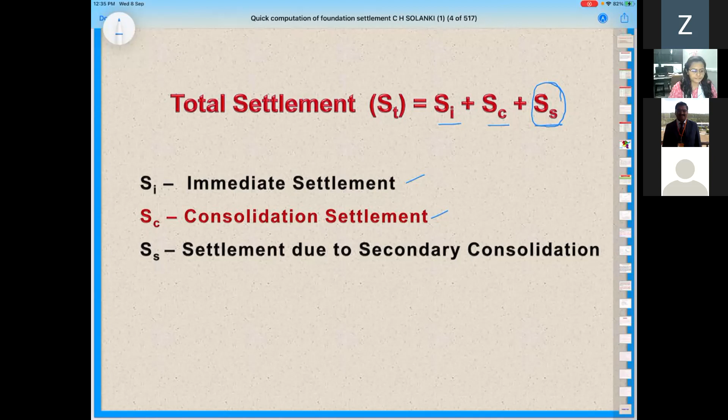Why have we selected this topic and what is its need? Whenever you go for sampling, there are chances of sample disturbance, hence reliability is poor in case of such collections. Time to investigate takes much time to finalize the soil report. Whenever you perform a consolidation test, it takes a longer time, requiring loading to be applied progressively and corresponding deformation measured. Consolidation tests are also slightly expensive compared to other tests.

Hence in many cases, the soil report excludes the consolidation test even when it is needed for saturated clay. The aim of this work is to establish a fairly reliable forecast of consolidation parameters and total settlement at a specified time, using statistically acceptable reduced number of tests, saving both time and cost. This presentation proposes a new approach for quick settlement analysis of cohesive alluvial deposits using new empirical correlations for compressibility parameters.

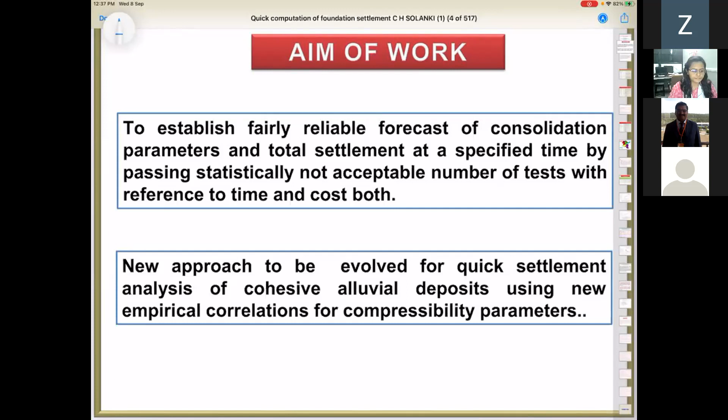The scope of this presentation includes: first, subsoil characteristics of alluvial deposits, discussing the characteristics found in the South Gujarat region and surroundings; second, empirical correlations for compressibility parameters of soil available from the literature as well as our own attempts; third, statistical analysis of the subsoil characteristics; and finally, verification of the range of properties by laboratory tests and the new correlations developed.

Proposed new empirical correlations for alluvial deposits, including validation, will be presented here. Finally, the most important part of this presentation is to show the empirical model for foundation settlement of alluvial deposits. At the end, we will see the empirical model we have prepared for computation of the foundation settlement.

Whenever we are starting any research, we need to go through the literature review. Your guide will ask you to go through the literature review first. How it has to be done and what to do in it is very, very important.

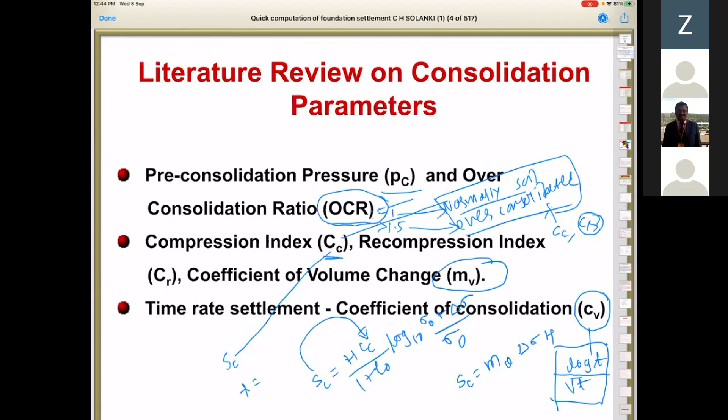Pre-consolidation pressure or stress is the maximum effective stress to which the soil has been subjected in the past. Casagrande's method to obtain the pre-consolidation pressure from the consolidation test is based on the point of greatest curvature. Many of you are familiar with pre-consolidation pressure and its determination using consolidation test data - this is the procedure for performing the consolidation test.

Finding out the pre-consolidation pressure using the void ratio versus log sigma curve. What we are doing is establish a point A at which the curve has a minimum radius of curvature. So this is the point A where you are establishing the curve.

Draw a horizontal line AB. You need to draw the horizontal line AB. Draw the line AC tangent at A. You are doing these things.

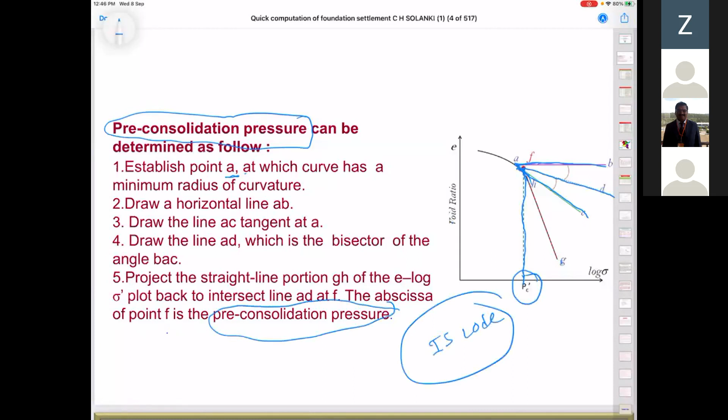Draw a line AD which bisects this, and project the straight line portion GH of the E versus log sigma curve back to intersect line AD at F. This is intersecting at F, and corresponding to this point on the log scale, you are finding out the corresponding PC, that is the pre-consolidation pressure. This method is accepted by our IS code, which is the Casagrande's method to find out the pre-consolidation pressure.

Now, over-consolidation ratio is related with the pre-consolidation pressure. This parameter is used in determining the magnitude of the settlement. The ratio of the pre-consolidation pressure and present overburden pressure is known as the over-consolidation ratio. So OCR indicates PC upon P0.

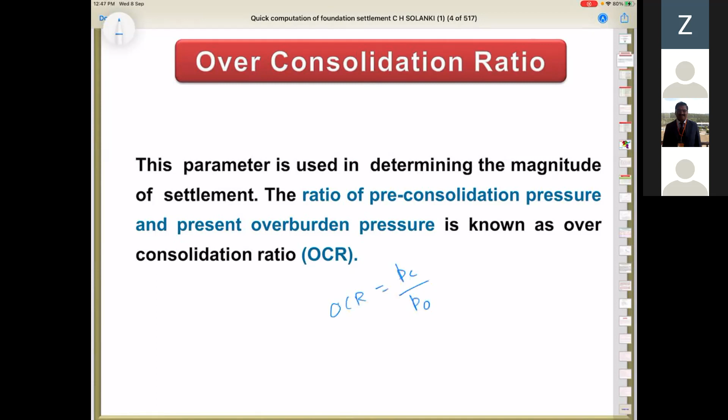Various graphical methods are available to evaluate the pre-consolidation pressure. As shown, the Casagrande's method is accepted by the IS code for determination of the pre-consolidation pressure. These methods are usually based on the relationship between experimental void ratio E and effective consolidation pressure P dash. All these methods are operator dependent as they require accurate reading of the logarithmic scale, drafting capability, and proper judgment of selecting the points.

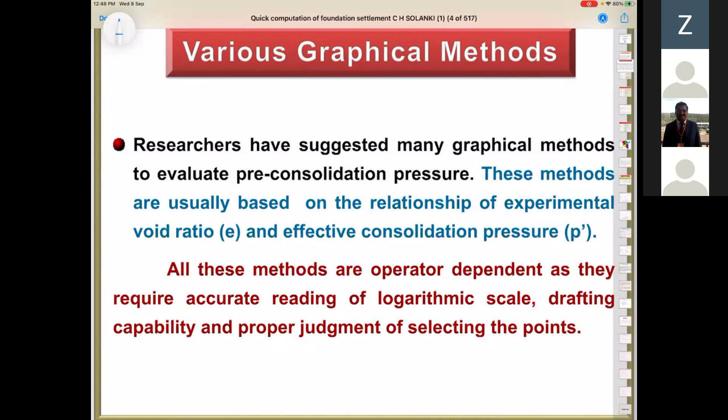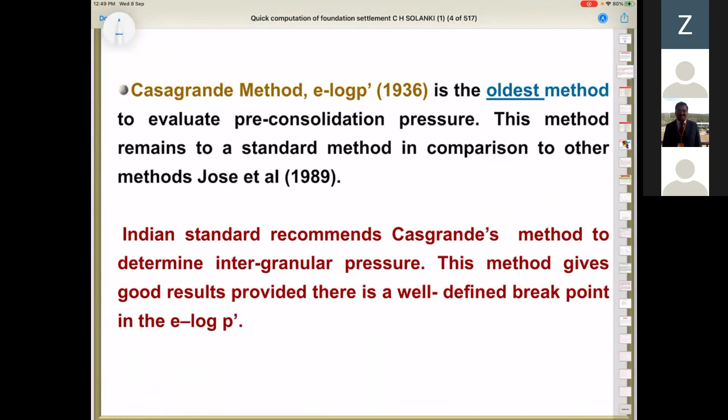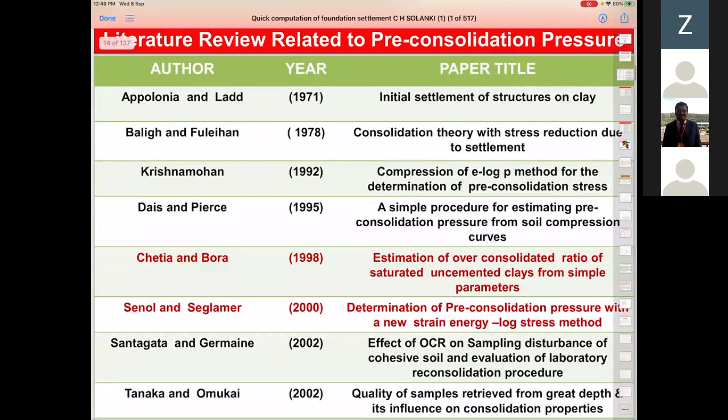Now we are coming to the literature review related to the pre-consolidation pressure of the soil.

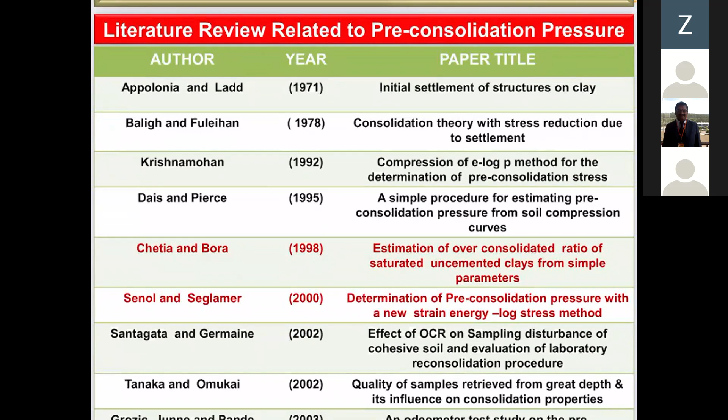Here you can see that some of the literature have been shown in red color. These papers are being used most in our study, and I will be discussing what we have collected from this literature and how it has been utilized for our study. Similarly, you will find some papers marked with red color which have been used for our work.

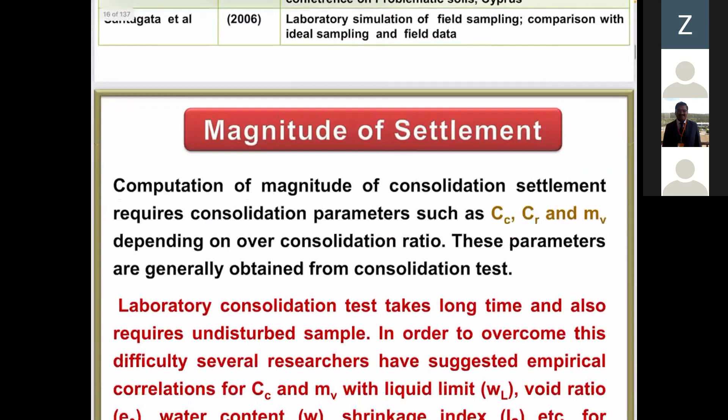Now we are coming to the magnitude of the settlement. As discussed, whenever we study consolidation settlement, we need to know the magnitude of the settlement and how much time it will take to settle. As far as the significance of the parameters are concerned, in view of CC, CR, and MV, which has been shown in the previous slides.

Laboratory consolidation test takes a long time and also requires undisturbed samples. In order to overcome this difficulty, several researchers have suggested empirical correlations for CC and MV.

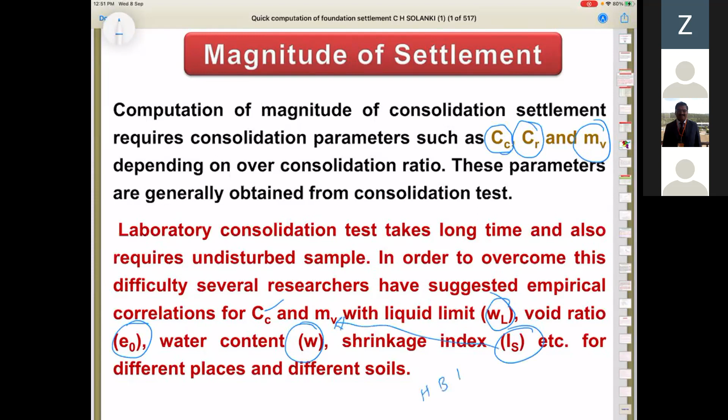Various empirical correlations have been suggested by researchers for the compression index, using the liquid limit, void ratio, water content, and shrinkage index. Shrinkage index is correlated for the value of MV, which has been given in the paper by Professor H.B. Nagaraj.

Compression index is the terminology which you find from the E versus log sigma curve, as the slope of that curve. So CC is found as delta E upon delta log sigma, which you calculate using the consolidation test data, in the form of delta E upon delta log sigma.

Whereas these empirical correlations are suggested by various authors and researchers such as Skempton, Terzaghi, Nishida, Amin, Nath, Park and Koumoto, and Nagaraj. Recompression index CR is the slope of the E versus log sigma rebound curve.

This is the term CR which has to be obtained from the rebound curve, and a new terminology has been introduced in our study, that is the compression ratio CC dash, equal to CC upon 1 plus E0. So we are going to introduce this parameter in our study in developing the correlations for CC dash.

So whenever you refer to the equation of consolidation settlement, SC is equal to H times CC upon 1 plus E0, times log10 of (sigma0 plus delta sigma) upon sigma0. This part is known as CC dash.

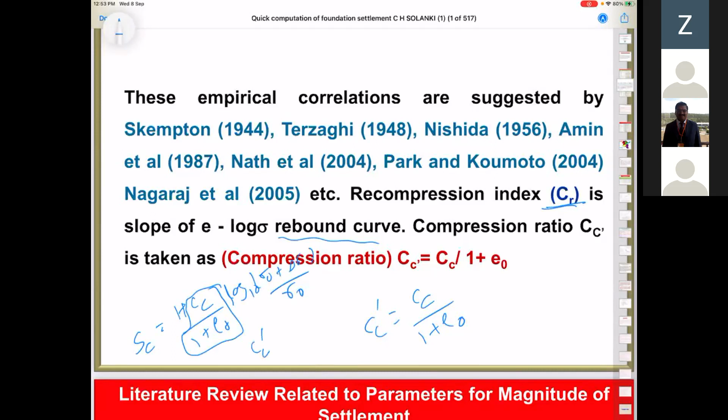Literature review related to the parameters for magnitude of settlement has been mentioned here. The papers shown in red color are being used in our study for various purposes. Other references or literature are for your reference, and if you need to refer anything from that, you can get it.

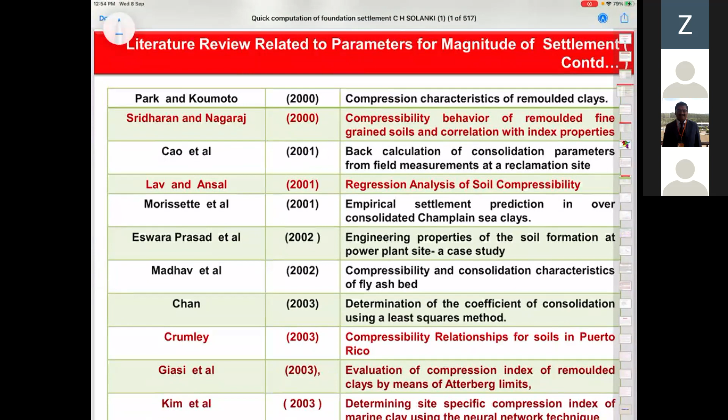These are the papers related to the magnitude of settlement, and it has been continued in terms of the long list of literature for determination of various parameters, such as the compression index, using simple properties of the soil.

Saxena et al. in 1995 presented one paper in the Indian Geotechnical Conference, IGC 1995, for the correlations of the compression index using simple properties of the soil.

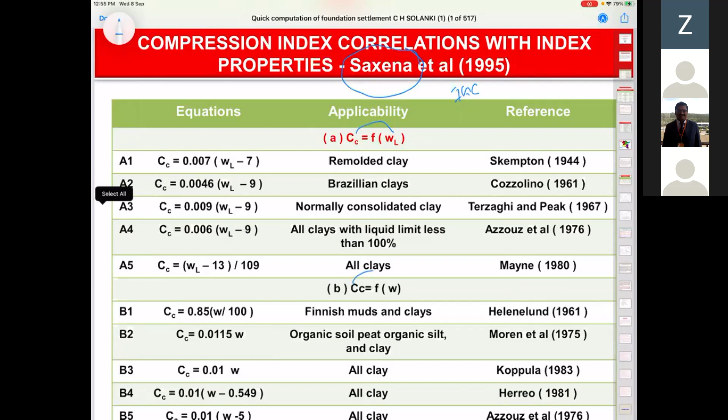In part A, you can refer that the compression index is correlated with the liquid limit. Here the compression index has been correlated with the water content. Here the compression index has been correlated with the void ratio. And here the compression index is related with multiple parameters such as void ratio, liquid limit, and water content.

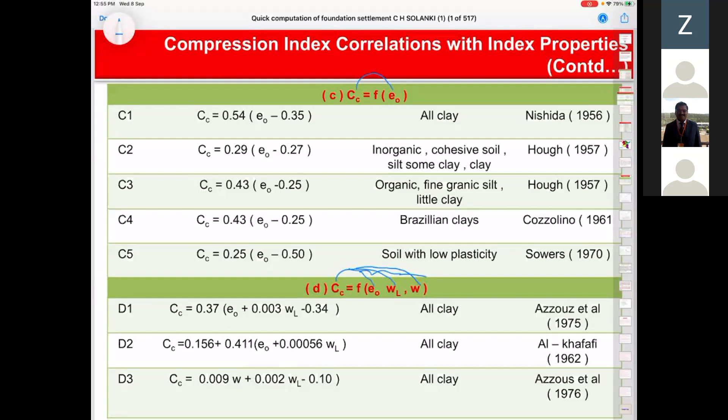This has given us some guidelines on what parameters have to be used for determining the consolidation parameters, and accordingly we have started our study for developing new correlations for the compressibility parameters.

Coefficient of compressibility is one parameter given by av equals minus delta e upon delta sigma, and the unit of the same is meter square per kilonewton.

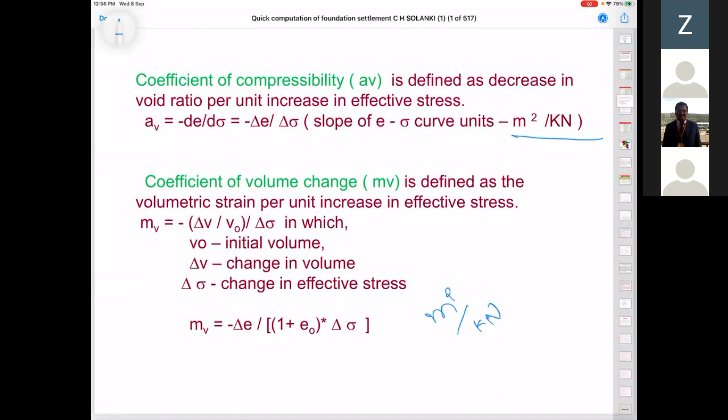Similarly, the coefficient of volume change, mv, is equal to minus delta e upon 1 plus e0 into delta sigma, and you can find out the coefficient of volume change according to this. The unit of these parameters is meter square per kilonewton. You might not find these units anywhere else, but this one is unique.

The coefficient of volume change, mv, is a parameter which indicates the amount of compression that the soil will undergo with an increase of pressure. It is defined as the change in volume per unit volume for a unit change in effective vertical stress, given by mv equals delta e upon 1 plus e delta sigma v.

Nagaraj, 2005 - H.B. Nagaraj is a professor in Bangalore at one of the universities. He did his PhD study from IISc Bangalore and presented a paper at IIT Madras in 2005, in the symposium named Predictions in Geotechnical Engineering, where he correlated the value of mv with the shrinkage index, IS.

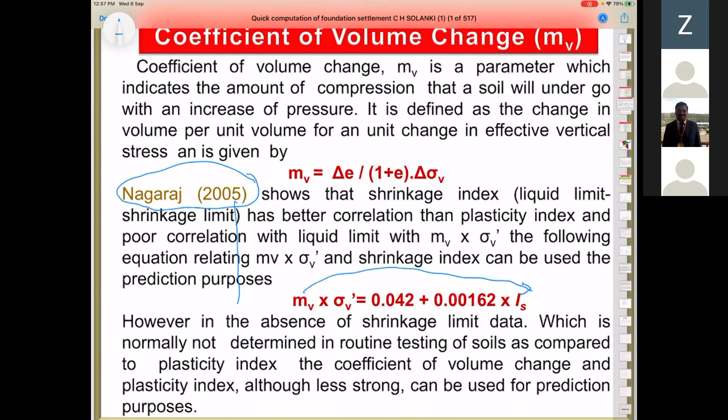So the correlation of the coefficient of volume change with the shrinkage index, developed by Professor Nagaraj, has been presented here in this slide.

Time rate settlement: it is essential to conduct a routine one-dimensional consolidation test to obtain the coefficient of consolidation, Cv. Various time fitting curves are available to evaluate Cv. This is a time-consuming process, and curve fitting procedures available in the literature are not completely satisfactory in evaluating Cv, hence large variation is obtained in the evaluated values by different procedures.

Nagaraj, 2004 - generally square root time fitting or log time fitting curves are used for the evaluation of Cv. The rate of settlement is directly related to the rate of excess pore pressure dissipation. Coefficient of consolidation Cv is useful in determining the time required for a finite percentage of consolidation.

The coefficient of consolidation, Cv, generally decreases as the liquid limit of the soil increases. The range of variation of Cv for a given liquid limit is very high, and Cv varies with both the level of stress and the degree of consolidation. So Cv is one of the important parameters, as discussed, in determining the time rate settlement.

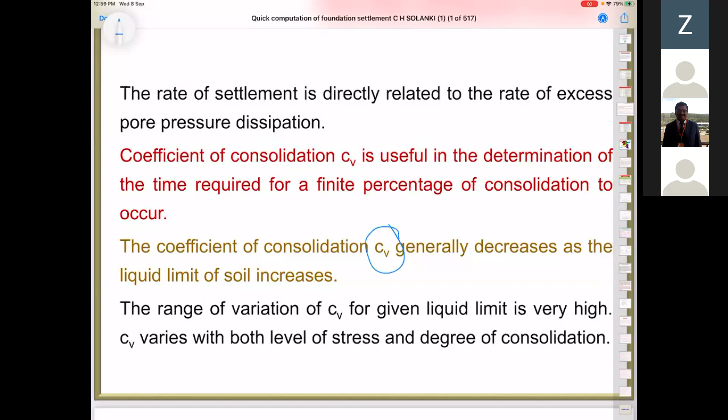A logarithmic scale, that is deformation or dial gauge reading versus time, has to be plotted in view of deriving the value of coefficient of consolidation. This is the log time fitting method, and the procedure has been listed here in this slide, where you obtain the Cv value at 50% of the average degree of consolidation, with the time factor taken as 0.197.

H is the thickness of the stratum, which is responsible to drain the water - thickness of the stratum - and T50 is the time required for 50% consolidation.

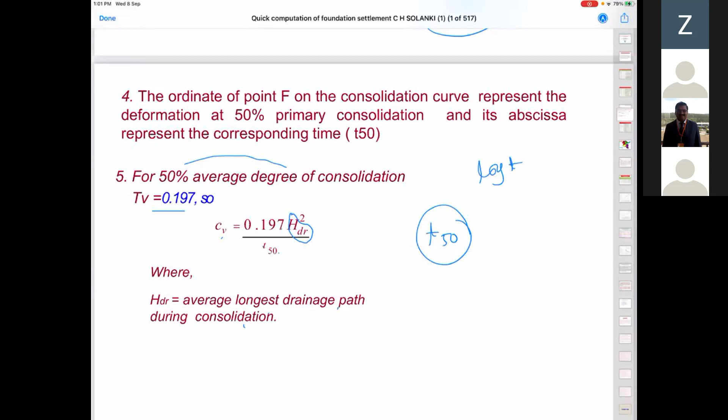This method of log time fitting gives you the value of time required for 50% consolidation, with the average longest drainage path during consolidation taken as HDR, the drainage path. The log time fitting method gives you the T50 value, whereas the square root time fitting method gives you the value of T90.

Time required for 90% consolidation can be obtained by the square root time fitting method. The time factor for T90, that is 90% consolidation, is 0.848, and hence you can find out the coefficient of consolidation value CV using this square root time fitting method.

Now the coefficient of consolidation has been correlated by various researchers with the liquid limit. This shows that an increase in the liquid limit decreases the coefficient of consolidation. So the values increased and these values are being decreased, which indicates that the increase in liquid limit decreases the coefficient of consolidation.

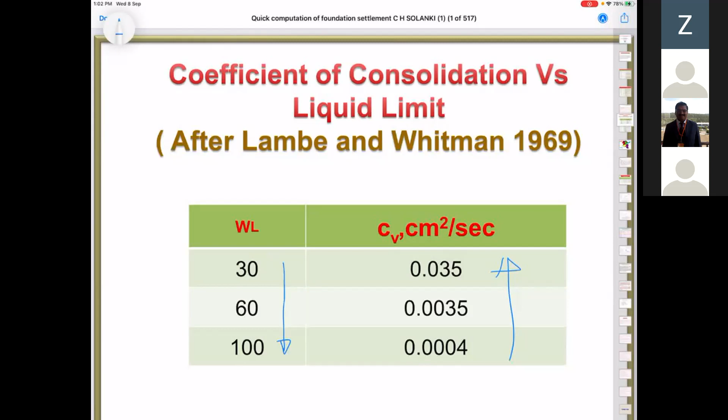Lower the value of CV, the time required for consolidation is higher, and accordingly, higher the value of CV, the time required for consolidation is lower.

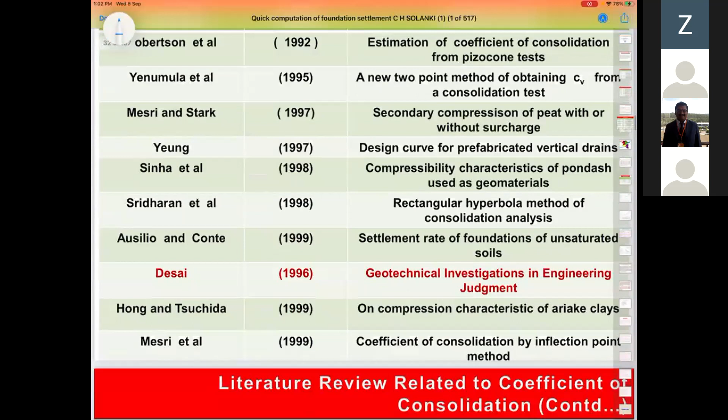Now this is the literature review related to the coefficient of consolidation, listed here with the name of the authors, year of publication, and paper title. The papers marked with red color are being used for some of the studies in our work, and other papers are for your reference. Whenever I send the PDF file or PPT to the organizer, you may refer to the papers required for your study.

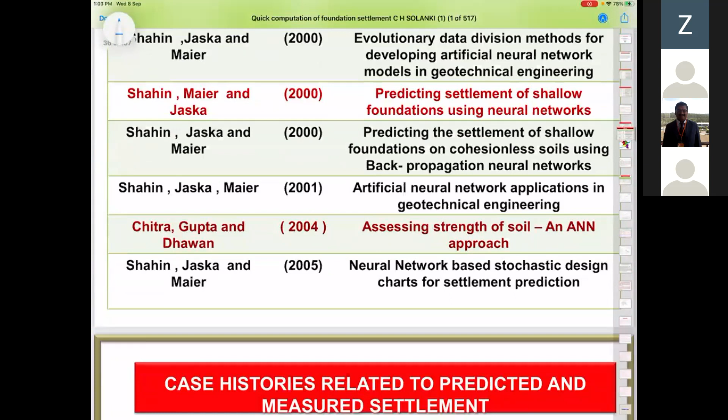These three papers have been studied and some conclusions made regarding why predicted settlement deviates from actual settlement. Some common causes have been found from these papers and listed here. In some cases, the predicted settlement deviates to a large extent from the actual observed settlement. Causes for this variation may be one or more of the following.

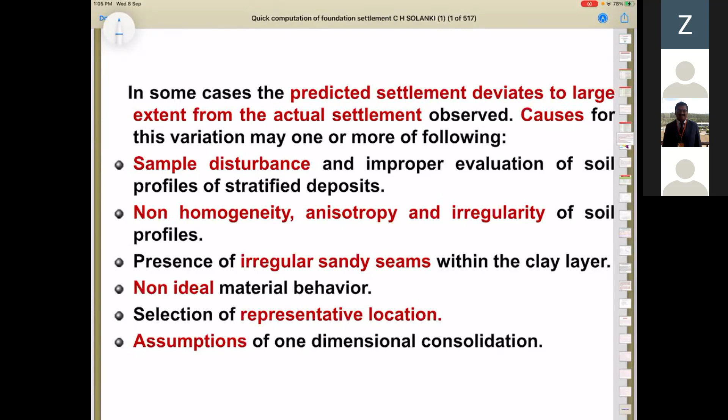Sample disturbance and improper evaluation of soil profiles of stratified deposits; non-homogeneity, anisotropy, and irregularity of soil profiles; presence of irregular sandy seams within clay layers; non-ideal material behavior; and selection of representative locations along with assumptions of one-dimensional consolidation. These are the various causes why predicted settlement deviates from the actual settlement we measure.

Now, after this literature review covering various consolidation parameters, I am coming to the study area: which study area we have selected, what are its properties, the newly developed correlations, use of the correlations, and an empirical model, which I will discuss in this next part of the presentation.

Professor Mehul, or Professor Saraswati? Yes sir, may I be audible to you clearly? Yes sir, perfect. Are my slides visible to you? Yes sir, it is visible. Whatever I mark with the pen in blue color, is it possible to see from your side? Yes sir, it was visible in the previous slide. I'm confirming these things 2-3 times in a lecture so that if something goes wrong, I can come to know. Okay, that's fine sir.

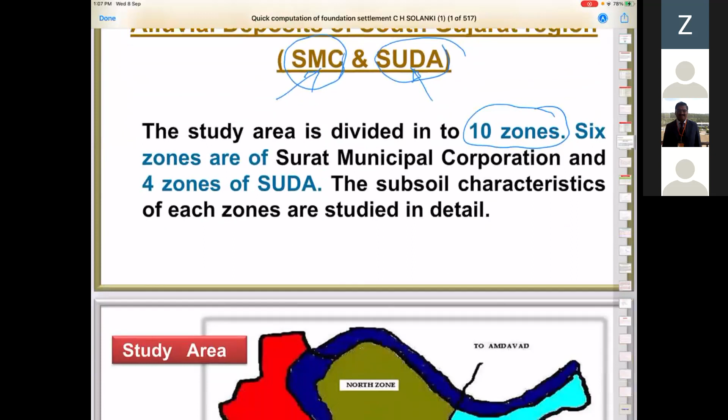You can find here the zones of Surat Municipal Corporation, divided into East Zone, North Zone, West Zone, Southwest Zone, Central Zone, and South Zone. I am going to show you which area comes under which part, so those familiar with Surat city or its surroundings can come to know in which area it falls.

This has been divided long back in 2016. Nowadays, some part of SUDA has come under the SMC limits, but whenever we studied these things, it has been plotted here. These are the different zones, and corresponding locations of these zones have been listed here. You can see which zones come under which area, or which area comes under which zone. It can be seen from this slide.

This is the slide of the Surat Municipal Corporation, and this is the SUDA divisions. In addition to the 6 zones of the Surat Municipal Corporation, you also have the 4 zones of the Surat Urban Development Authority. So you are having a total of 6 zones plus 4.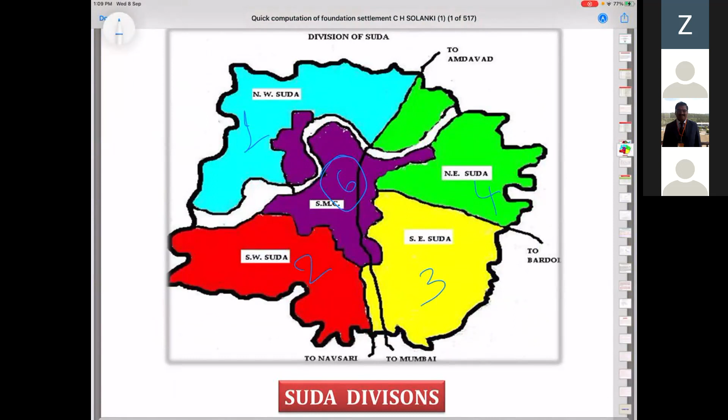We have the Northwest SUDA, Southwest SUDA, Southeast SUDA, and Northeast SUDA. Zones of the SUDA as per 2006, the zones and locations, which locations come under which zone, have been mentioned here. So you can refer to the area which falls in which zone, as presented here.

Now we are coming to the subsoil characteristics which we have studied for the particular zones or the areas which we have studied. So, Surat Municipal Corporation and Surat Urban Development Authority zones with subsoil characteristics, average subsoil characteristics.

The soil characteristics of each zone are studied up to a depth of 8 meters. This depth is the maximum stress zone for shallow foundations. Generally for multi-story buildings here in Surat city or surroundings, this is located at the 3 meter depth, and the most soil properties up to the depth of 8 meters are being studied.

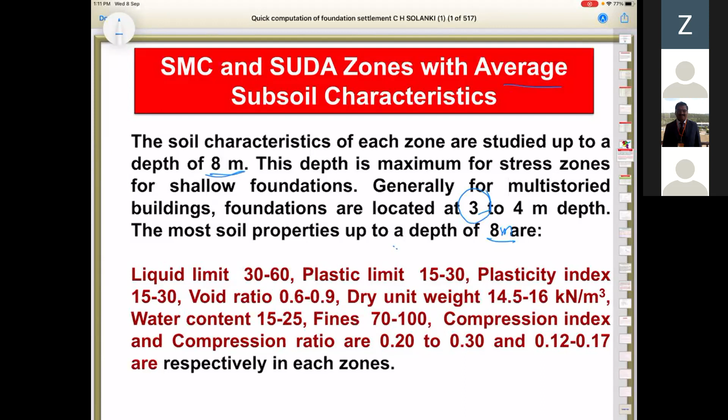Liquid limit is in the range of 30 to 60. Plastic limit is in the range of 15 to 30. Plasticity index is in the range of 15 to 30. Void ratio 0.6 to 0.9. Dry unit weight 14.5 to 16 kilonewton per meter cube. Water content is in the range of 15 to 25. Fines in the range of 70 to 100. Compression index and compression ratio are in the range of 0.2 to 0.3 and 0.12 to 0.17 respectively in each zone.

These are the properties which we are required to study, for which we have developed correlations. So we have the liquid limit, plastic limit, plasticity index, void ratio, dry unit weight, water content, porosity, fines, clay content, silt content, compression index, compression ratio, differential free swell, and etc.

Now, statistical analysis of the soil index and consolidation properties. A data set containing the index and consolidation parameters is used to conduct a statistical study to determine the suitable correlations for estimating the consolidation response. This statistical analysis is carried out in order to obtain the most suitable and practically applicable relationships.

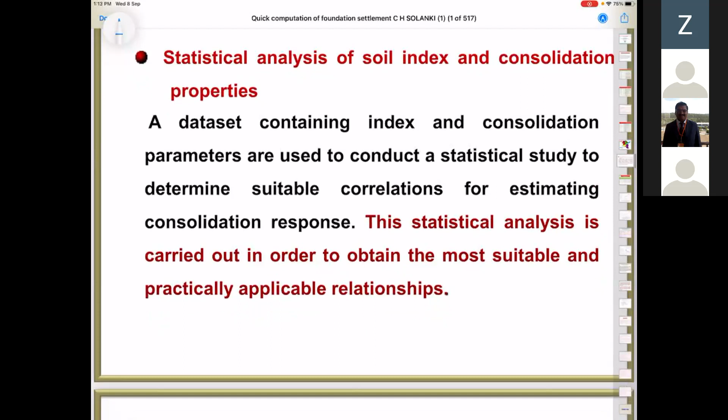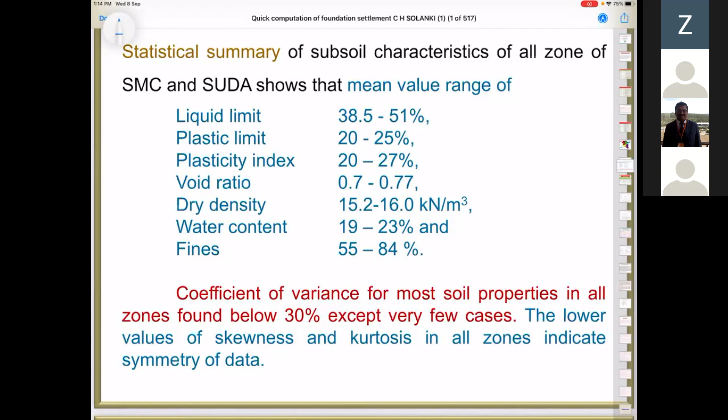Here you have the statistical summary of the subsoil characteristics for all zones. The mean value range for these properties has been mentioned here in this slide. Now, the coefficient of variance for most soil properties in all zones is found below 30%, except in very few cases. The lower value of skewness and kurtosis in all zones indicates the symmetry of the data. The coefficient of variance has been found below 30%. It indicates that it gives more confidence to us for developing the correlations.

Now we are coming to the empirical correlations for alluvial deposits. The magnitude of the consolidation is determined from the compression index. Compression index of the soil is generally obtained from consolidation test data.

Researchers have suggested various correlations for the compression index of soil, as consolidation tests have many limitations. In view of that, these parameters are being used for determining the consolidation parameters from the available literature. From that, we selected random equations for finding the compression index using the liquid limit, and these are the 7 equations used for our study.

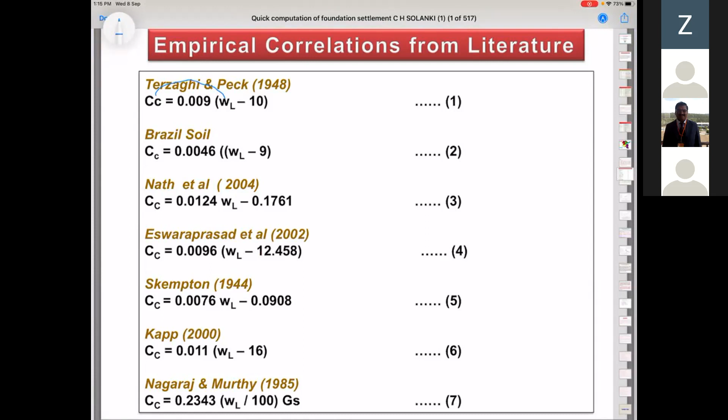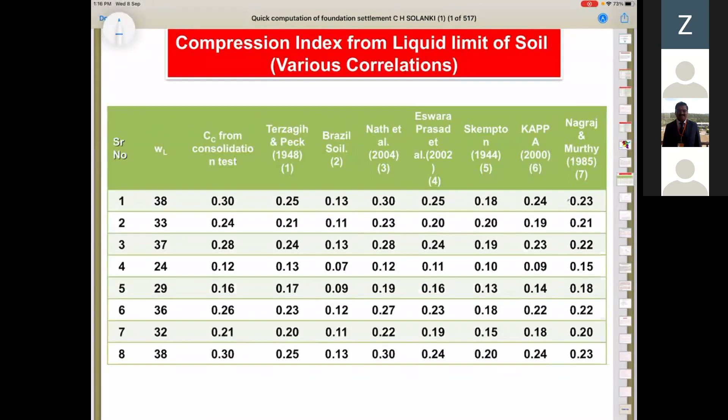We tried to implement these equations for our study, but results have been found that the values do not match with the actual values obtained from the consolidation test data. Using these values with the consolidation test data and the various equations, here is a plot of the same.

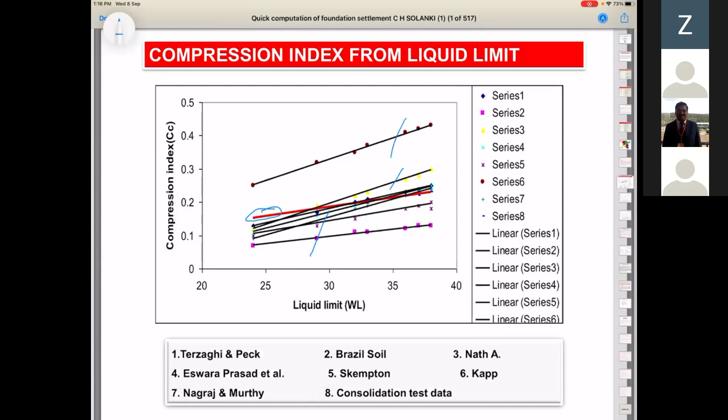This red line is from the consolidation test data. Other lines are from the different empirical correlations. It has been found that this line does not match with any of the other lines. A similar thing happened for the void ratio, and no single line is found matching with the same in these cases. In view of that, it has been found that there is a need for development of new correlations.

Various methods and empirical correlations are available to predict the consolidation parameters. Use of empirical correlations for consolidation parameters cannot be generalized for all places and all soils. Empirical correlations should be used only after verifying their feasibility for a particular region and type of soil.

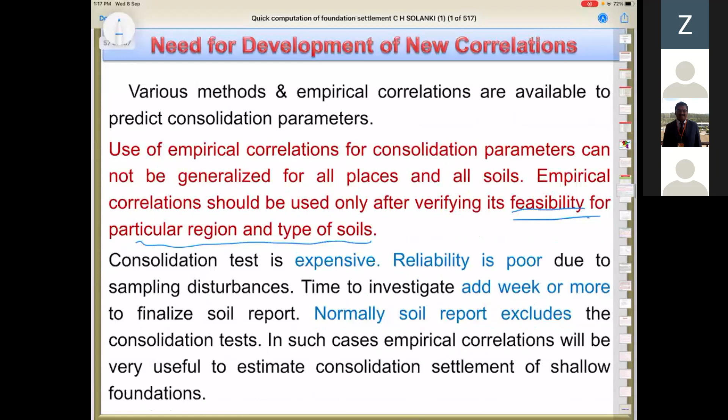Now, while applying these values and determining the compression index using the liquid limit, the R-square value has been found out to be 0.8435.

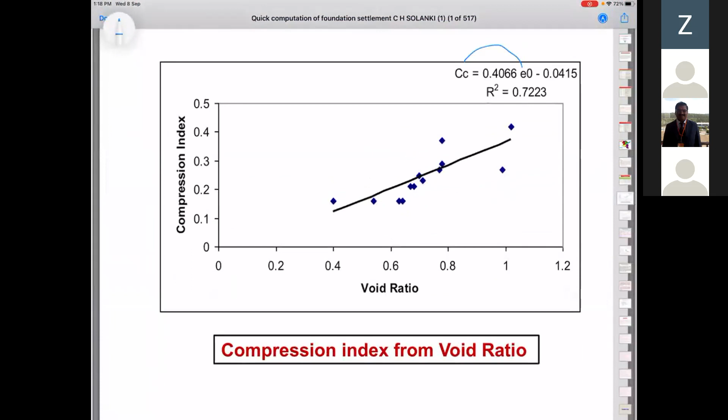Similarly, while using the void ratio, the R-square value has been found out as 0.72. Using the plasticity index, the R-square value has been found out as 0.78. Compression index using the plasticity index has been determined, with the R-square value found in this way.

So we also have the compression index from porosity, with an R-square value of 0.71, and the compression index from water content, where the R-square value is 0.77. These are the correlations of the compression index using the various parameters.

I have discussed liquid limit, plasticity index, void ratio, water content, and porosity. Similarly, the compression ratio has been computed, and the value of the compression ratio from liquid limit has been obtained with an R-square value of 0.90.

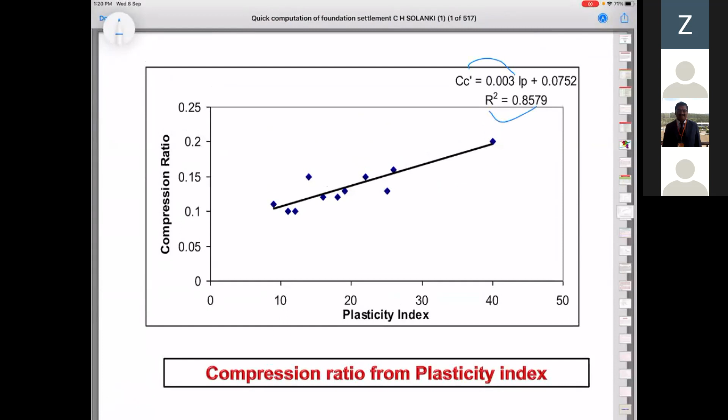Similarly, the compression ratio value has been obtained for plasticity index IP with an R-square value of 0.8579, and compression ratio from water content has been determined with an R-square value of 0.67.

So using the various simple parameters for finding out the compression index and compression ratio, it has been shown that these properties give a good value for the coefficient of determination. So new correlations are being developed for the compression index and compression ratio.

These relations are being developed, but it has been found that using the liquid limit and the plasticity index gives a higher value of correlation coefficient or coefficient of determination compared to the other properties. So in further study, we have tried to restrict our study to using the liquid limit and plasticity index for finding out the correlations.

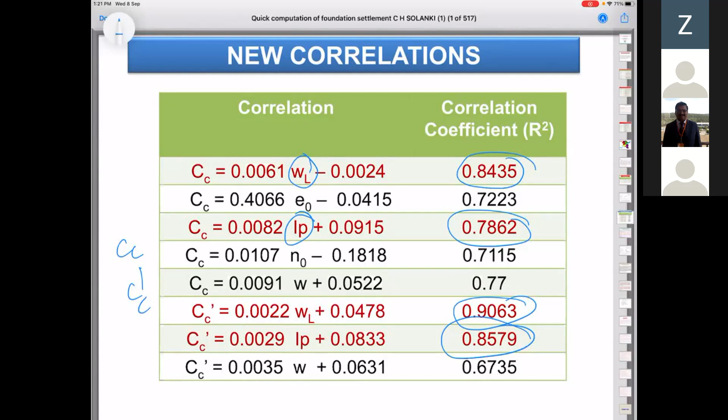We also have the significance of plasticity characteristics on compressibility parameters of alluvial deposits.

In the previous study, new correlations were proposed for prediction of the compression index and compression ratio using the liquid limit, plasticity index, water content, void ratio, and porosity for alluvial deposits of SMC and surroundings. The correlations obtained using soil plasticity characteristics have a higher value of correlation coefficients. These correlations are used for predicting the compression index and compression ratio for all zones of SMC and SUDA.

So, application of new correlations: new correlations derived for the compression index of soil using soil index properties are used for different zones of SMC and SUDA region. Experimental results of different zones are studied for soil index and consolidation properties. Measured data of SMC and SUDA give a reasonably good correlation coefficient between soil plasticity and compression characteristics.

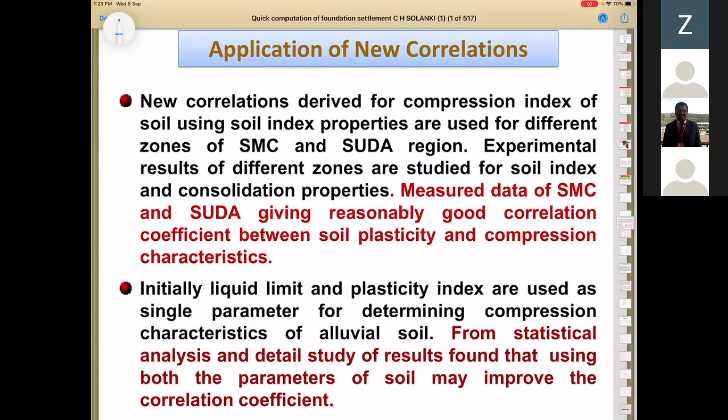Now we are coming to the next slide, that is new empirical correlations. Professor Mehul? Yes sir, everything is okay?

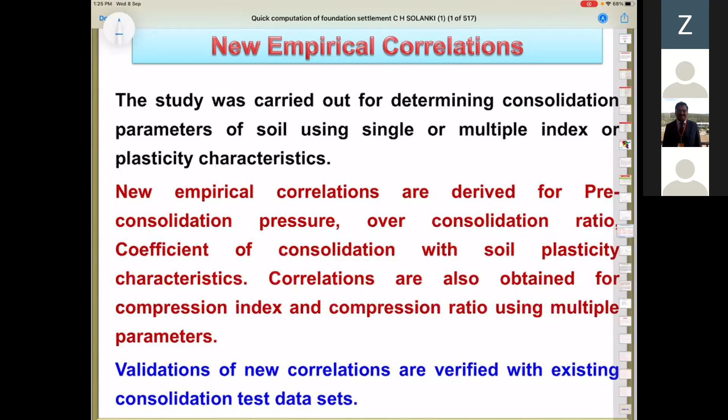Yes sir, fine. So new empirical correlations have to be developed, and the study was carried out for determining the consolidation parameters of soil using single or multiple index or plasticity characteristics. New empirical correlations are derived for the pre-consolidation pressure, over-consolidation ratio, and coefficient of consolidation with soil plasticity characteristics. Correlations are also obtained for compression index and compression ratio using multiple parameters.

So our target is to find out the correlations for these parameters which have been discussed to you, starting from the presentation: pre-consolidation pressure, over-consolidation ratio, compression index CC, compression ratio CC dash, and coefficient of consolidation CV. We are targeting here to derive new empirical correlations for alluvial soils using simple properties, which has to be presented to you now.

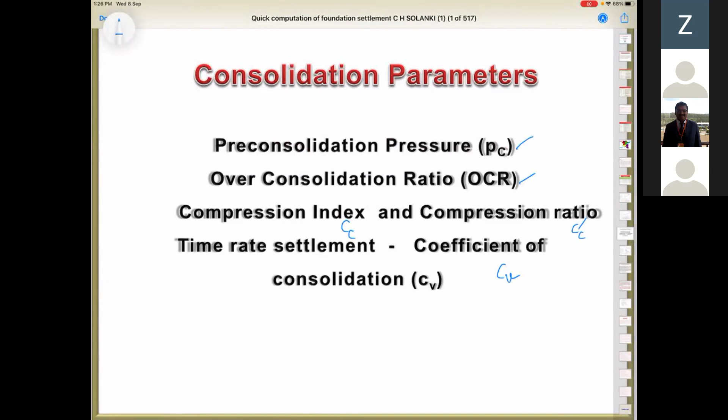Now you see that Nagaraj et al. in 1991 showed that the pre-consolidation pressure PC can be determined on the basis of the simple parameter E by EL, where E is the natural void ratio and EL is the void ratio at the liquid limit.

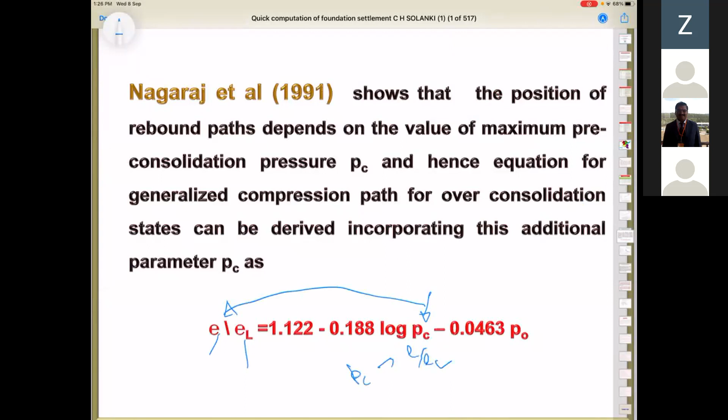So PC can be a function of E by EL, which you can find here. A similar thing has been presented by Chetia and Bora in 1998, and they found that the over-consolidation ratio can be correlated with E by EL, where this is nothing but the existing overburden pressure. So PC can be a function of E by EL, and similar things have been implemented in our study for finding out the pre-consolidation pressure and over-consolidation ratio using the simple E by EL parameter.

So correlations for pre-consolidation pressure and over-consolidation ratio have been shown here. Using soil index and consolidation test data, new empirical correlations are proposed for pre-consolidation pressure in kilonewton per meter square and over-consolidation ratio for alluvial deposits. So PC has to be determined on the basis of PO.

This equation has been derived from our data. Similarly, a correlation has been developed for OCR with respect to the E by EL ratio. So you can find here, in our study using simple properties, we can find out the pre-consolidation pressure and over-consolidation ratio using the simple parameter known as the E by EL parameter.

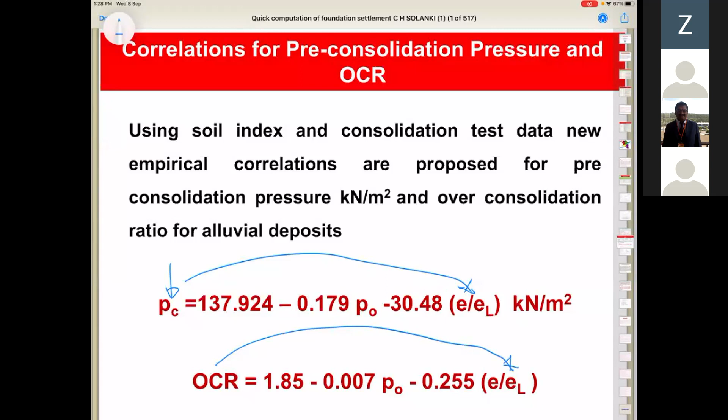Measured versus predicted over-consolidation ratio has been shown here, and the R square value has been found out at 0.793. This indicates that in the case of pre-consolidation pressure and over-consolidation ratio, whenever compared, it gives good correlation coefficient values, which has given us confidence to use for our study and research.

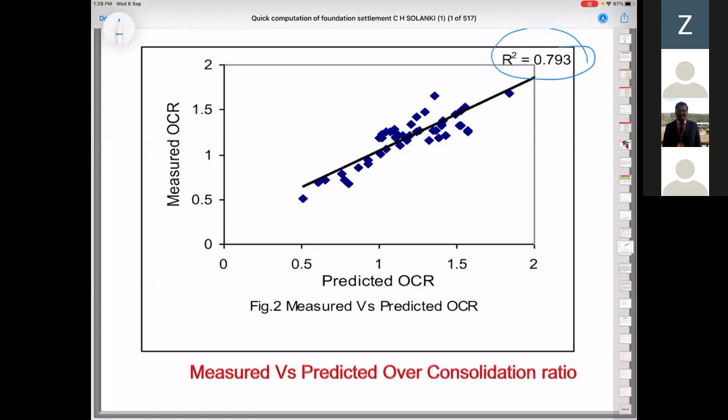Measured versus predicted CV has been compared once again from plasticity index, and the R square value has been found better in comparing with the plasticity index, at 0.8661.

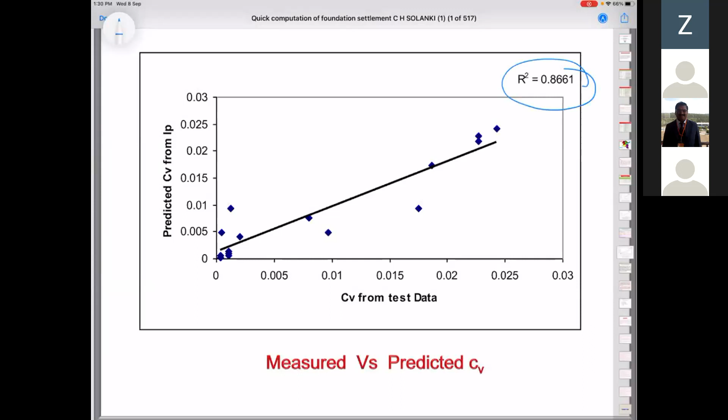Coefficient of consolidation from plasticity index has been shown, with an R square value of some more better value with the plasticity index, at 0.9156. So whatever I have shown to you, in comparison of the liquid limit and plasticity index, developing the correlations, this is how we have obtained the correlations for the pre-consolidation pressure, over-consolidation ratio, and coefficient of consolidation.

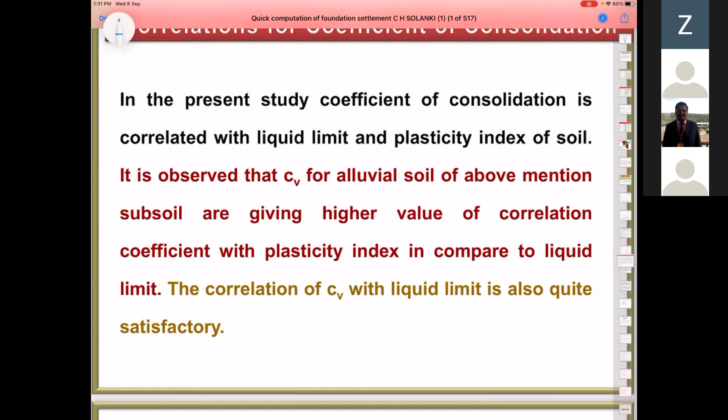Now, correlations for coefficient of consolidation. In the present study, the coefficient of consolidation is correlated with the liquid limit and plasticity index of soil. It is observed that CV for alluvial soil of above mentioned subsoil gives higher value of correlation coefficient with plasticity index compared to the liquid limit. The correlation of CV with liquid limit is also quite satisfactory.

New empirical correlations are derived using the liquid limit and plasticity index for determining the coefficient of consolidation of alluvial soils of above mentioned properties, using the test data of loading range up to 200 kilonewton per meter square. This loading range has been kept in view of the shallow foundation. Even if you go for exploration or stress intensity up to 10 meters and multiply it with 20 kilonewton per meter square, this gives you the confining pressure of 200 kilonewton per meter square. So in view of that, these values have been kept here, and CV value correlation has been found with the liquid limit and plasticity index and presented here.

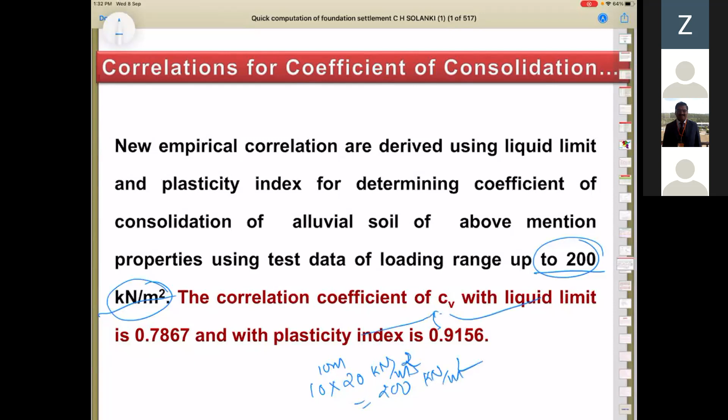Now, correlations for compression index and compression ratio of the soil.

Professor Mehul, may I take a 2 minute break? Yes sir, yes yes sir, 2 minutes break only. Yeah, for sure, water sir. Okay, okay.

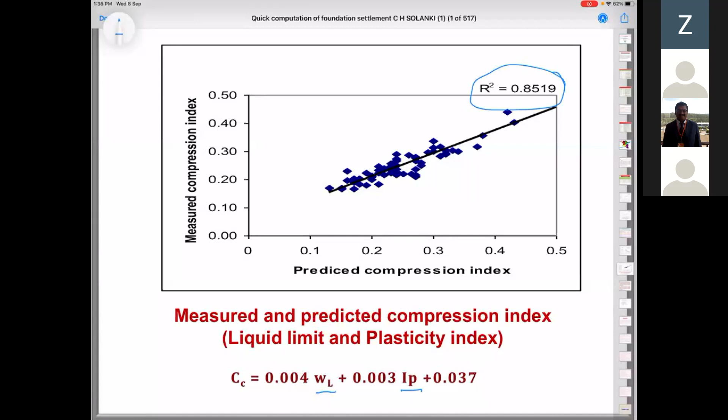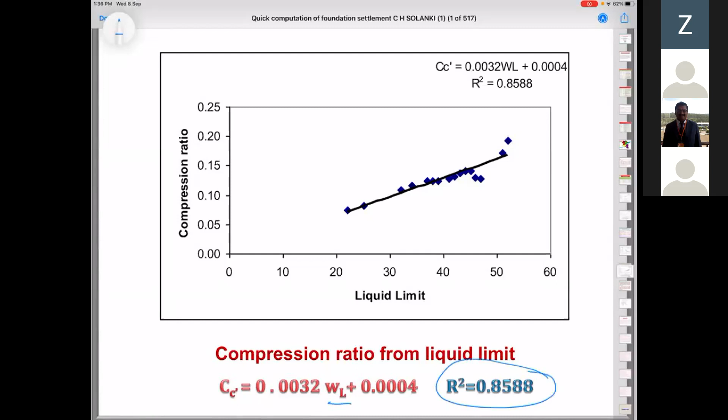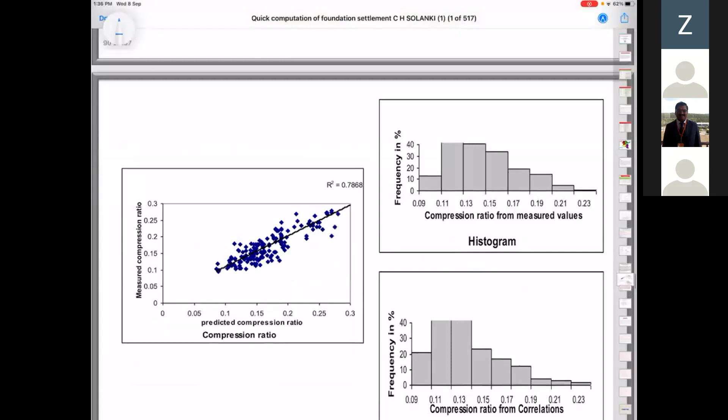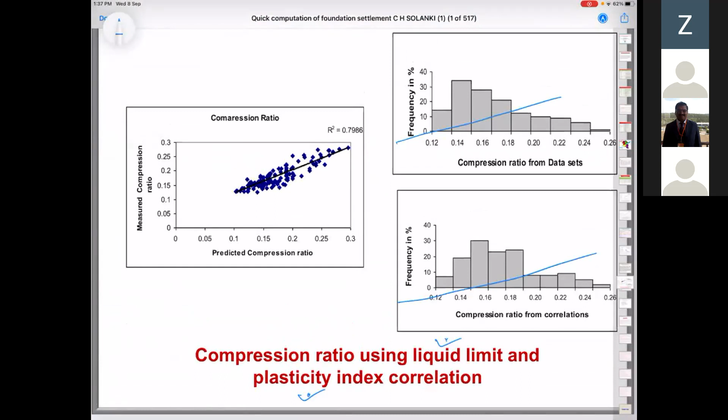Now, predicted and measured compression ratio, when compared using the two parameters such as liquid limit and plasticity index, the CC dash value has been found with R square of 0.7986. Whenever comparing in this way, the light dotted line and dark line are matching. Whenever studied in terms of histogram, compression ratio from measured values and compression ratio from correlations show similar histograms in both cases. A similar thing has happened while comparing using both properties, liquid limit and plasticity index. The nature of histograms has been found very similar.

The various empirical correlations are used for determining the compression ratio of different consolidation test data. It is found that use of liquid limit and plasticity index both gives better correlation coefficient. In absence of the plasticity index data, correlation of liquid limit can be used.

The purpose of the study was to predict the compressibility parameters using the regression model with more general applicability. Prediction of compression index and compression ratio using the optimized multiple regression models may result in accurate consolidation settlement. We have used some data from research papers, one of which is the research paper on Pisa Tower.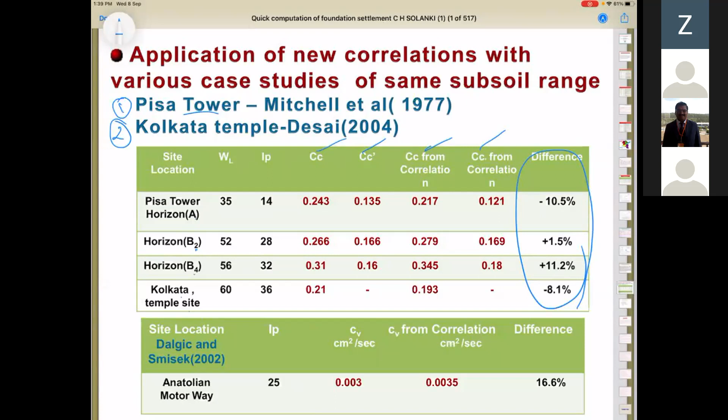Application of the new correlations with various case studies of the subsoil range, where we have used one paper on Pisa Tower and a second paper on Kolkata Temple, Desai 2004. So we have Pisa Tower with horizons A, B2, B4, and the Kolkata Temple site. These properties have been compared with the correlations CC and CC dash, using values from the research papers. The difference has been found around 11%. This seems to be good, and it has been shown that if other sites have properties in the same range, you can also go on utilizing the correlations which have been derived by us.

Now we are coming to the most important part of this presentation, that is the empirical model. What is the empirical model? What are the input data? What do we obtain using the input data, and how do we get the final settlement for the preliminary design? It has to be discussed. May I be audible clearly? Yes sir.

Okay, thank you. So the model introduction is that the empirical model is prepared to predict the settlement of shallow foundations, incorporating the soil index and plasticity characteristics. The model incorporates the computation of over-consolidation ratio, time rate of settlement, magnitude of settlement, and differential settlement of foundations.

The model will be useful for foundation design incorporating the differential settlement of foundations. This model is proposed to obtain the settlement of shallow foundations for alluvial deposits. In this model, input parameters are soil index and plasticity characteristics for obtaining the settlement of the foundations. These, in addition to geometrical foundation parameters and load on the foundations, are required to obtain the settlement using this empirical model.

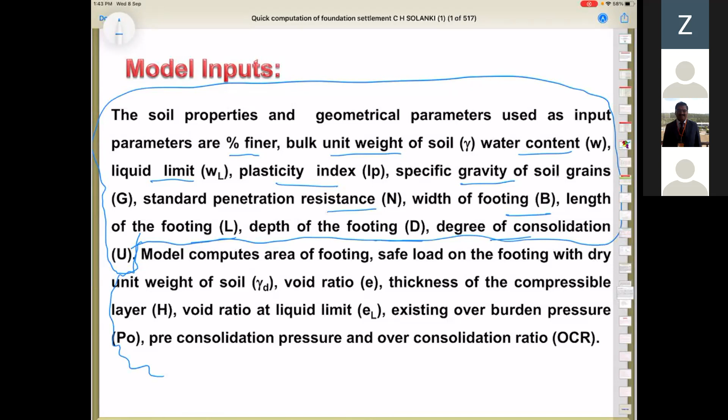Now, empirical model for computation of the foundation settlement of alluvial deposits. This is the project. You need to enter your project name, project number, and footing number. Percentage finer needs to be mentioned. Based on that, you can come to know whether the soil is a fine grain soil or a coarse grain soil. Types of soil are mentioned here in terms of the classification of the soil.

Then gamma is the unit weight, water content, liquid limit, plasticity index, specific gravity of the soil grains. Standard penetration test has been implemented here. The N value has been implemented to find out the immediate settlement of the foundation in case of sandy soil. So if a sandy stratum comes in between the clay soil, the standard penetration resistance can be determined.

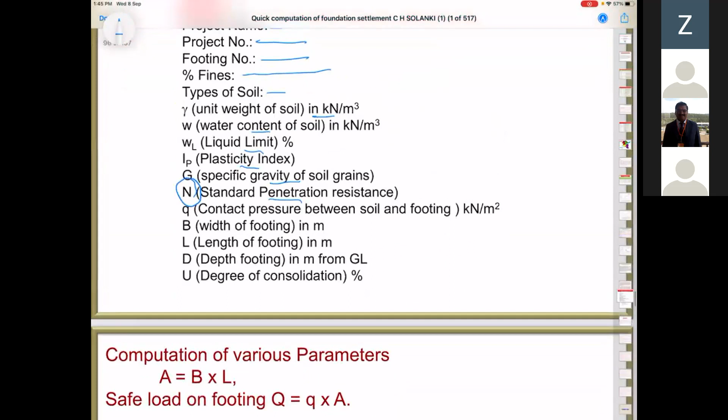Contact pressure between the soil and footing has to be mentioned, that is Q, where B is the width of the footing, L is the length of the footing, D is the depth of the footing in meters, and U is the degree of consolidation. The degree of consolidation is given to get the time rate settlement and other properties, which I am discussing while explaining the model computation.

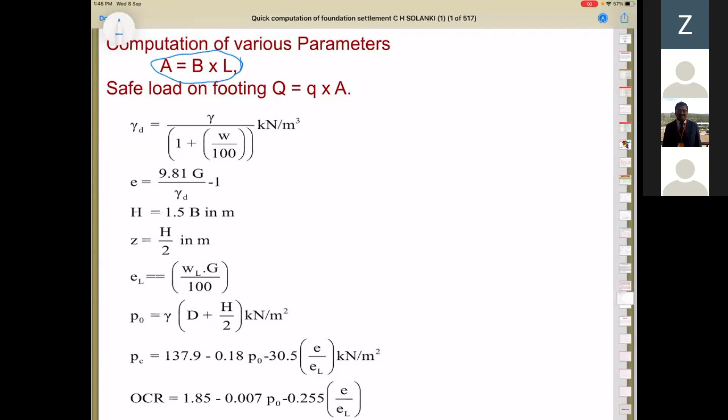So computation of various parameters has been done based on the input parameters, where area is equivalent to B into L, presented here where you give the size of the foundation, and based on that you get the area. The safe load on the footing can be computed on the basis of the contact pressure multiplied by the area of the footing, giving you the safe load to be applied.

Now, gamma D is the dry unit weight of the soil. You are familiar with the equation: gamma D is equal to gamma upon 1 plus W. Based on that, you find the dry unit weight of the soil. Void ratio E has to be applied as E is equal to G gamma W upon gamma D minus 1, where gamma W is 9.81, G is specific gravity, and gamma D has to be kept in kilonewton per meter cube, and hence you get the void ratio.

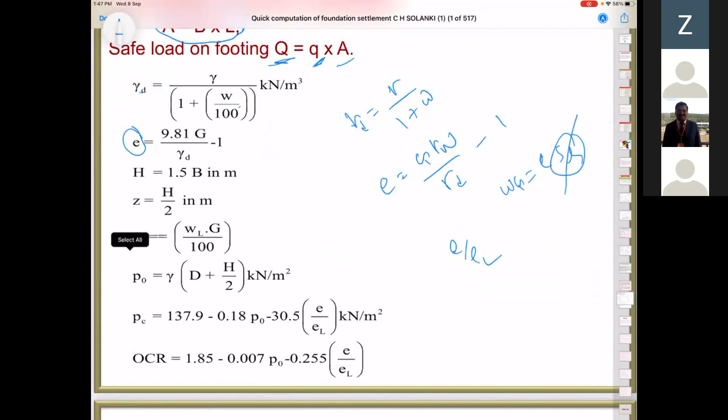The void ratio is needed here to compute E by EL. Similarly, as you know that WG is equal to ESR, whenever the degree of saturation is 100%, you have WL into G is equal to E. So based on that, the void ratio at the liquid limit can be determined: WLG is equal to EL.

So P0 is equal to gamma into D plus H by 2, and hence you get the original effective overburden pressure. Based on this computed data, you find the value of pre-consolidation pressure, which is determined by E by EL and P0 values.

So this model computes the pre-consolidation pressure based on the E by EL value. Similarly, the model computes the over-consolidation ratio based on the E by EL value. You can see here, this is the E by EL used to find out the OCR.

Whereas P0 is the existing overburden pressure, you are referring this slide to find out how the model computes the pre-consolidation pressure and over-consolidation ratio using a simple parameter known as the E by EL parameter.

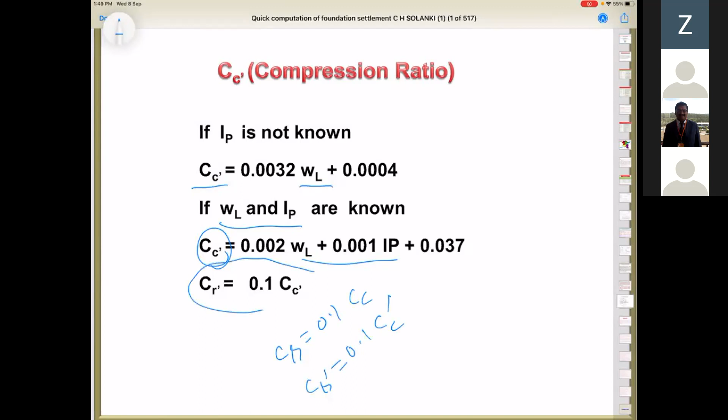From the literature, it has been found that the recompression index or recompression ratio is 0.1 times the compression index or compression ratio. That's why 10% of this value has been taken as the recompression ratio.

Now in computing the consolidation settlement using the over consolidation ratio, if the OCR is less than or equal to 1.5, the soil is considered normally consolidated, and consolidation settlement has to be computed based on the IS codes. If it is above 1.5, in such cases you are required to use both parameters in combination, CC dash and CR dash, to find out the value of the consolidation settlement.

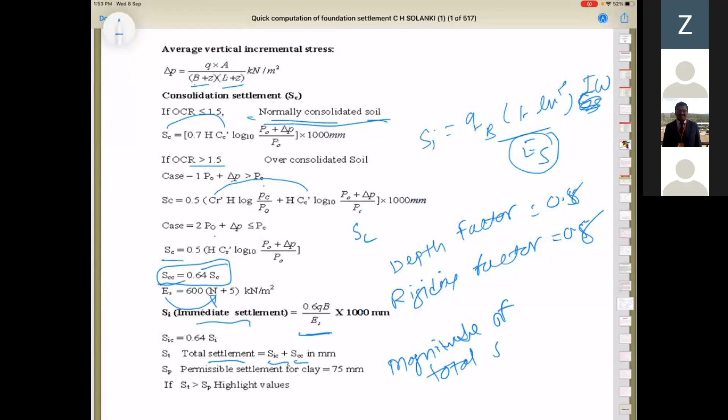In the next slide, we are going to see how to compute the time rate settlement, or difference between the settlement of the two footings. If IP is not known, CV, the coefficient of consolidation, is correlated with the WL or WP. So your degree of consolidation is less than 60%.

Your TV value is this, that is the time factor. If you have the degree of consolidation greater than 60%, in such cases your TV value is this. Depending on the value of the degree of consolidation, you will also have to see whether your drainage is single drainage or double drainage.

In case of single drainage, we take the depth of the compressible layer or thickness of the compressible layer as equal to the same. But in case of double drainage, as the drainage is from both sides, you are required to take half of the thickness, and based on that you determine the time required for consolidation. So time required for consolidation has been determined based on the time factor, the coefficient of consolidation, and the thickness of the stratum.

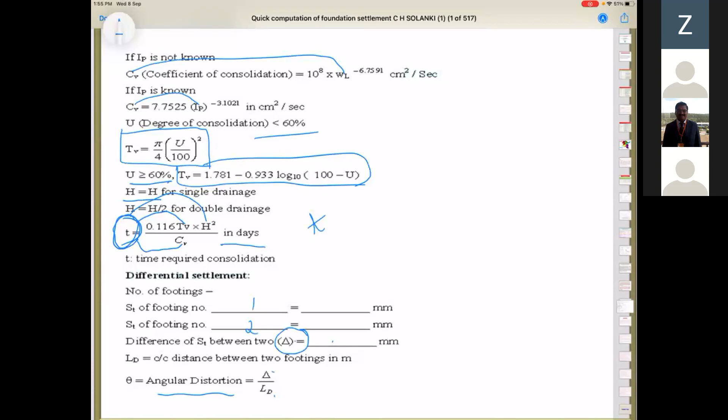Now, the center to center distance between the two footings is known. In such cases, the angular distortion can be determined in terms of the differential settlement divided by the distance between the two footings, that is, the center to center distance. So by this way, you can find out the differential settlement or the total settlement of the foundations.

Based on this study, we conclude that an extensive database of geotechnical properties of SMC and SUDA has been presented. It has been shown that such a database can provide information regarding trends, relationships, and statistical properties, and a mechanism whereby test results can be checked, along with geotechnical information for preliminary design purposes.

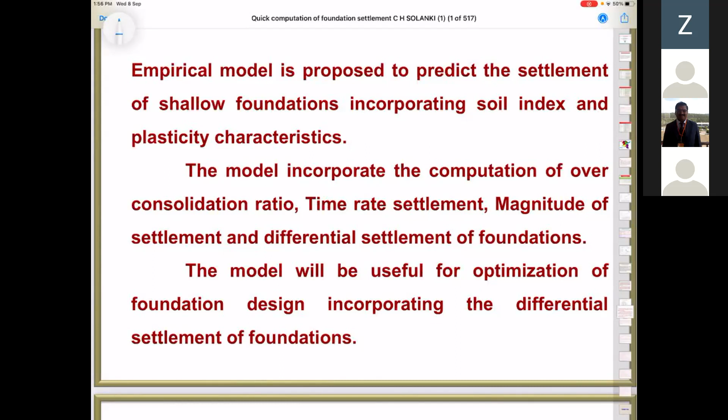An empirical model is proposed to predict the settlement of foundations, incorporating soil index and plasticity characteristics. The model incorporates computation of over consolidation ratio, time rate settlement, magnitude of settlement, and differential settlement of foundations. It will be useful for optimization of foundation design, incorporating the differential settlement of foundations.

So whatever various correlations we have developed in terms of the pre-consolidation pressure, post-consolidation pressure, CV values, CC values, etc., has been presented here.

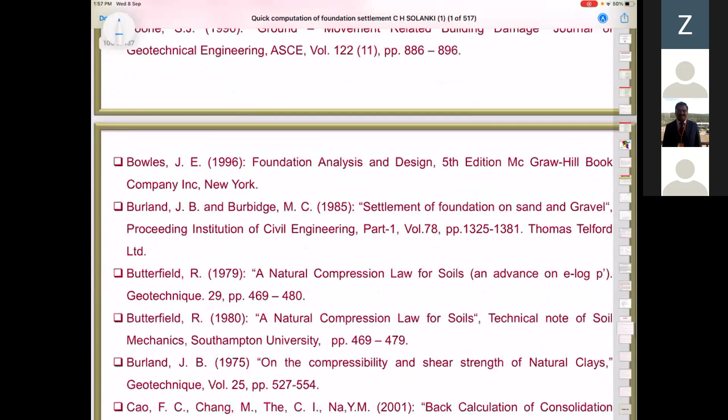And with this, I end my presentation here. These are the various references which have been shown to you here.